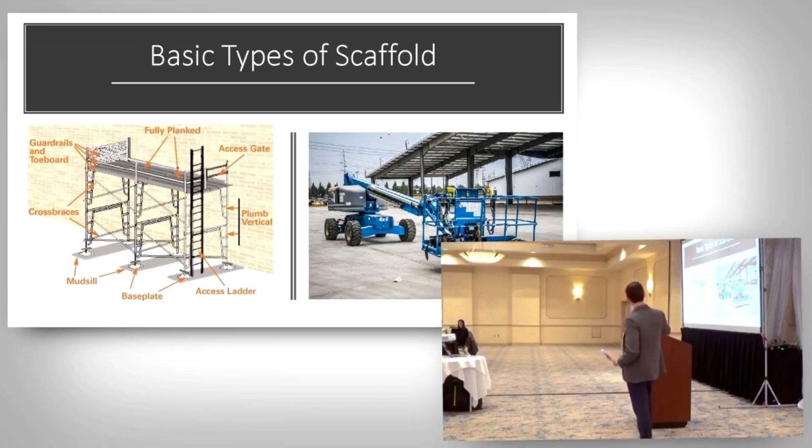So 2 of the basic types of scaffolding that we have, this one's a supported scaffold here. This one's an aerial scaffold. And these are the 2 types that I know the roofing side uses the most, as well as sheet metal. And we're going to talk a little bit about suspension scaffold as well that CBR uses a little bit.

What are some of the types of scaffold hazards? Who knows one of the types of hazards? Fall protection. Fall protection, so falls, right, slips. Maybe there's no guardrails, maybe you're not using a personal fall arrest system. What else? Gaps between the scaffolding. Gaps between the scaffolding, right, issues with the planks.

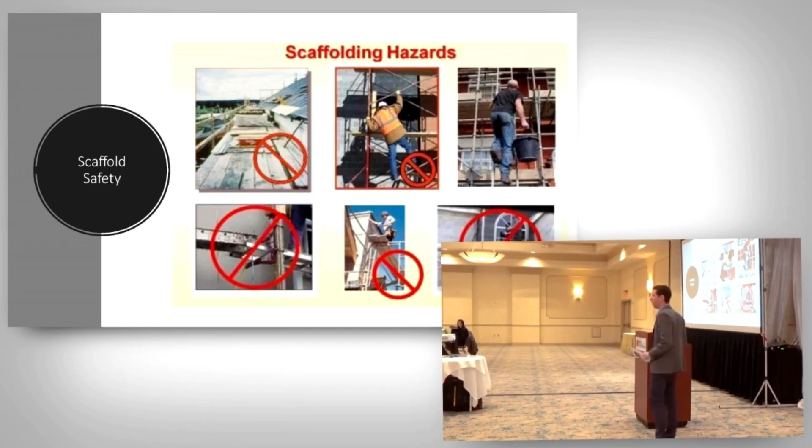How about overhead? Materials on the scaffolding, overhead. You don't need to be working on the scaffold for the scaffold to be a hazard. You can be working below it or around it. Okay? Electrical, working on scaffold that's near power lines that maybe isn't protected correctly.

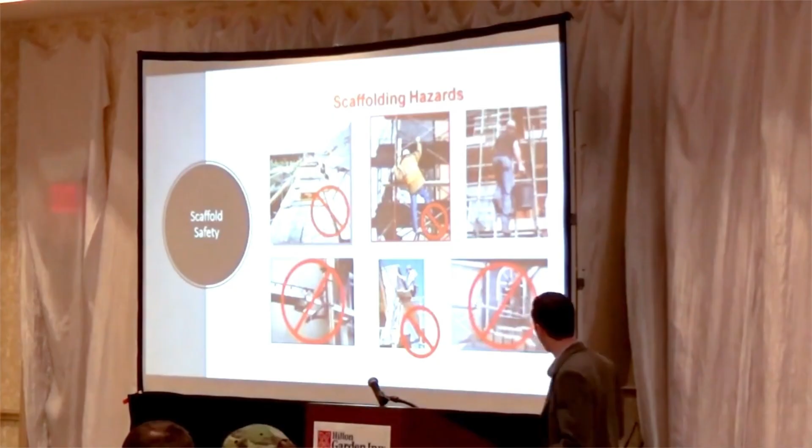How about if the scaffold collapses? We talked about 1/2 of all the accidents with scaffolding is from faulty scaffolding. So if it collapses, a hazard. Plank hazard we mentioned. How about bad weather? Ice, snow, wind, all can cause a hazard of scaffolding. And hit by, struck by. You're working on a job site with movable equipment, knocks into the scaffolding.

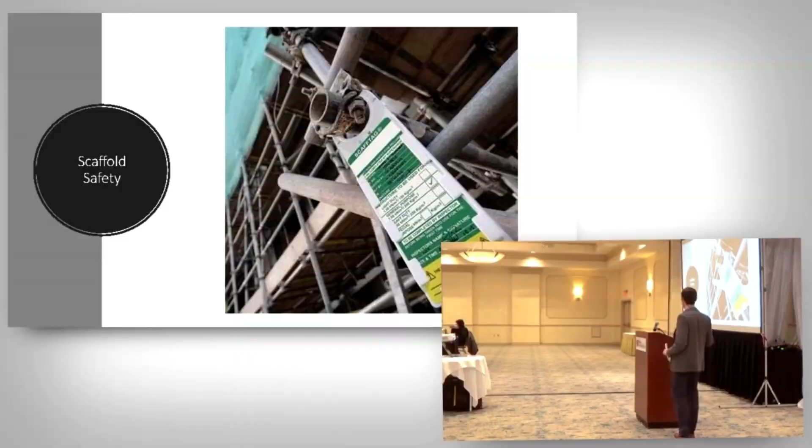What is this? Inspection tag. Every day the scaffold needs to be inspected by a competent person. Okay, what's a competent person? Someone that can identify hazards and correct them. So at the beginning of every day, a competent person needs to inspect the scaffold and hang this tag in a place where everyone can see it. It's usually at the bottom of the scaffold, the access point.

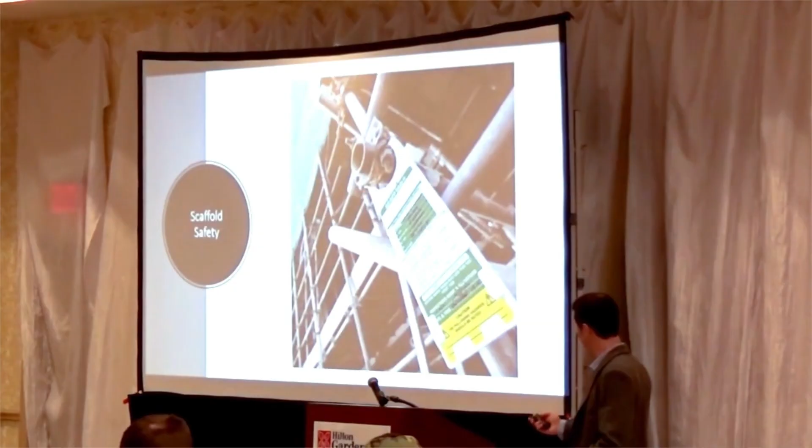What's our policy with hard hats on scaffolding? Wear it at all times, just like ladders, right? Always wear your hard hats. Here we go. How do we know scaffolding is safe? Solid foundation. This is a plank here put on the feet or the base of the scaffold. But our scaffolds are normally put on grass, mud, areas that aren't solid, so these are called mud sills.

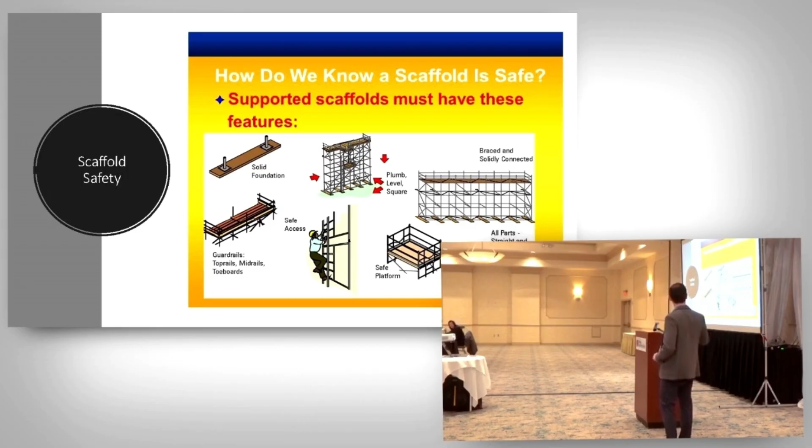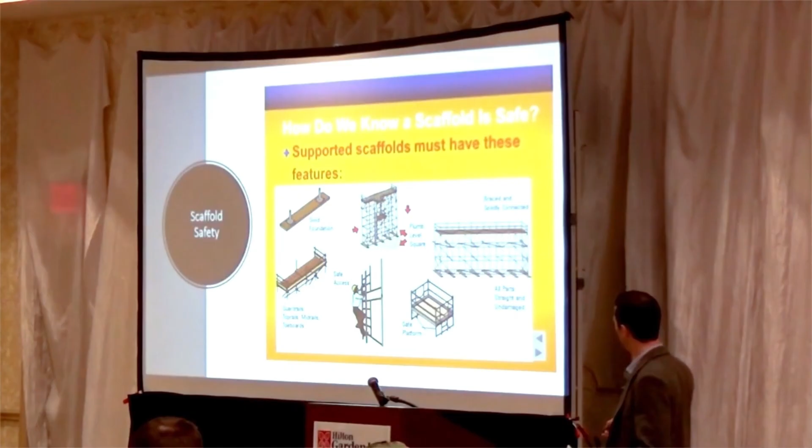Scaffold needs to be plumb and level, square, and braced. Every 20 foot vertically and every 30 foot horizontally needs to be braced. You need a safe work platform, you need a safe access, and guardrails. We talked about the guardrails and toe boards as well.

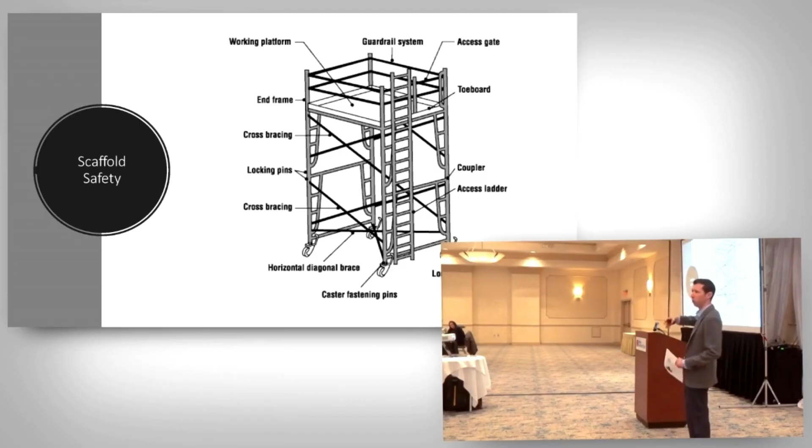This is a rolling tower. So on this, you need these locking casters. Okay, they need to be locked when you're working on the platform. What are the heights of the guardrails? 42 and 21, plus or minus 3 inches, right? Toe boards here. At what height do you need a toe board? Sorry? 10 foot. You don't need toe boards until you're at 10 foot. Guardrails you need at 6 foot.

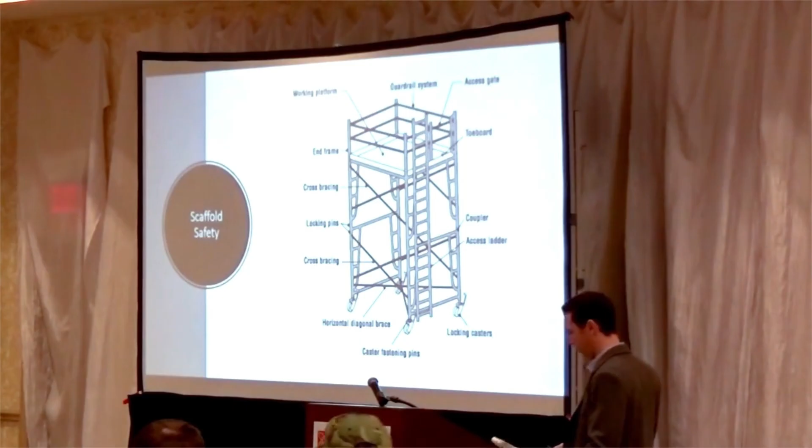Cross braces, this gives strength to the scaffold system. Are you allowed to climb these? You cannot climb the cross braces unless they're designed to be climbed. In most cases, they're not. Do we use a lot of wood plank scaffolding? I don't know if we see that a lot in our jobs. You do. You do? Okay.

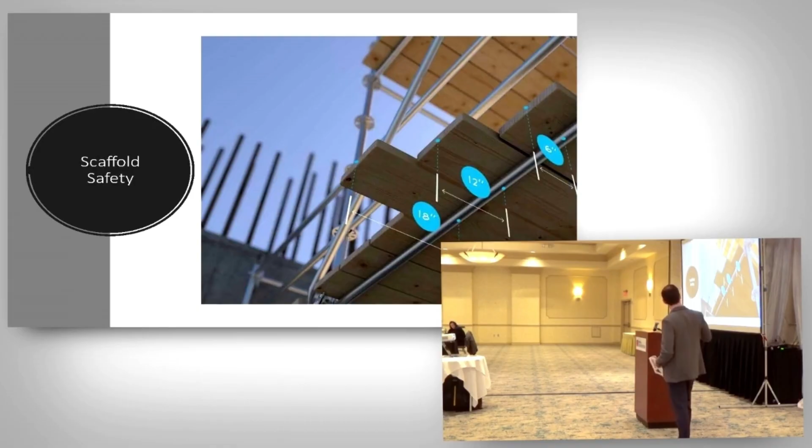2 important numbers to know. 6 inches and 12 inches. This is the end frame, the end support here. This point cannot be less than 6 inches overhanging the end support, and it cannot be greater than 12 inches. Okay, so 18 inches past this end support. This is out of compliance.

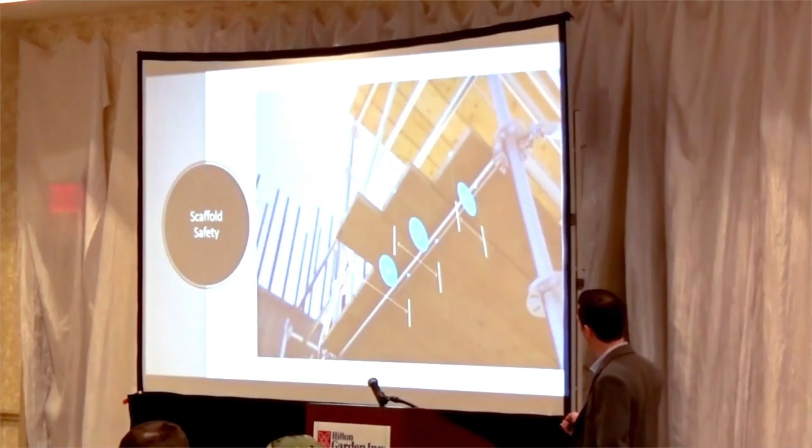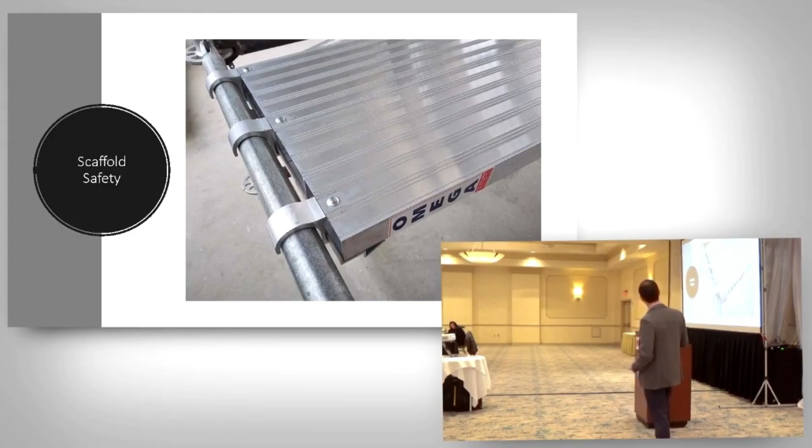This is an aluminum frame. I know we see these a lot. This thing right here, it might be tough to see, but it's that little lever on the bottom of the scaffold. It needs to be locked into place. That's what secures the scaffold plank to the frame.

And these are the kind of details, guys, they don't seem important until we have a high wind event and all of a sudden those planks start getting blown off and become flying objects. And I know we have started inspecting our scaffolding after it's erected instead of trusting the erectors. And we're getting better, they're getting better, but I don't know, and Mike, correct me, have we yet to have one installed properly the first time?

No. They're not installed by the guys that are installing them properly, ever. We've yet to have one time where every little clip was installed. I mean, the one that I know that's the most infuriating for me is when you get to the top and there's the gate that protects the access point and it opens out freely. That's awesome, right? So I can fall right off the scaffolding as opposed to being able to swing in and access the scaffolding. But I mean, the common sense stuff, you gotta look at it, check it.

We're auditing them now at installation. So when we accept it, it's been inspected. And I know Jim Petrosky's been doing a lot of those, as Jim Rehard probably has put down a fair amount. They are getting better, but just keep that in mind.

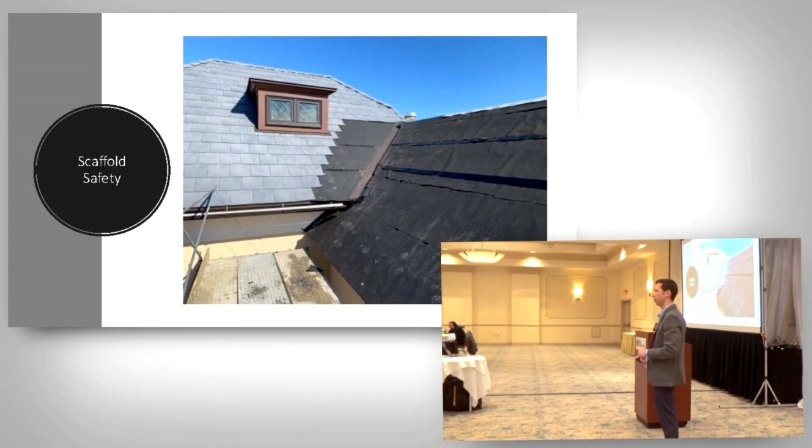The other thing is the other trades using them. Just like our safety rails on the perimeter, what was safe yesterday when it was inspected may not be safe. Somebody might have damaged, removed, or somehow modified the scaffolding to where it's no longer safe like it was yesterday. That's why it's important to inspect it every day, right?

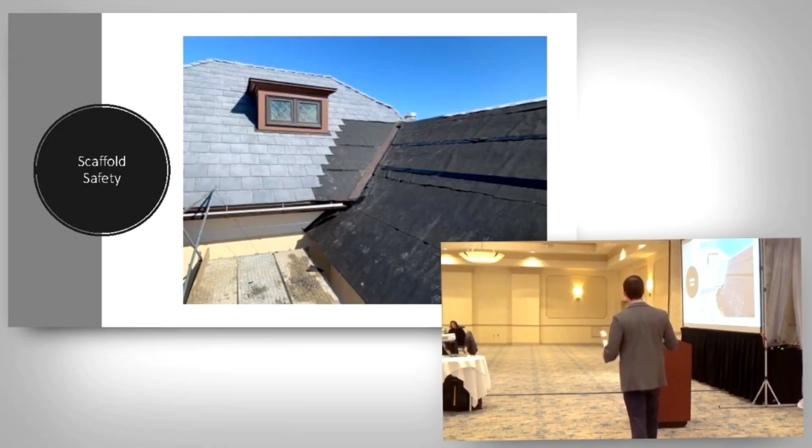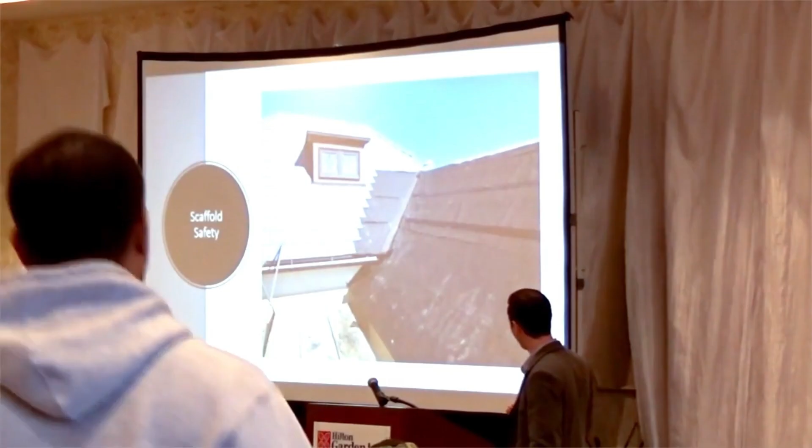What job is this? Crew. Nice. We won a couple nice awards for this job. Here's some scaffold that we had set up while Mr. Parabo was installing this nice looking slate here. We have a guardrail on the back end. There's no guardrail here, and there's no guardrail here. Is this in compliance?

Yes, it is. You do not need guardrails when the building side of the scaffold is 14 inches or less away from the building. A little bit different on suspension scaffolds. That number shrinks down to 12 inches.

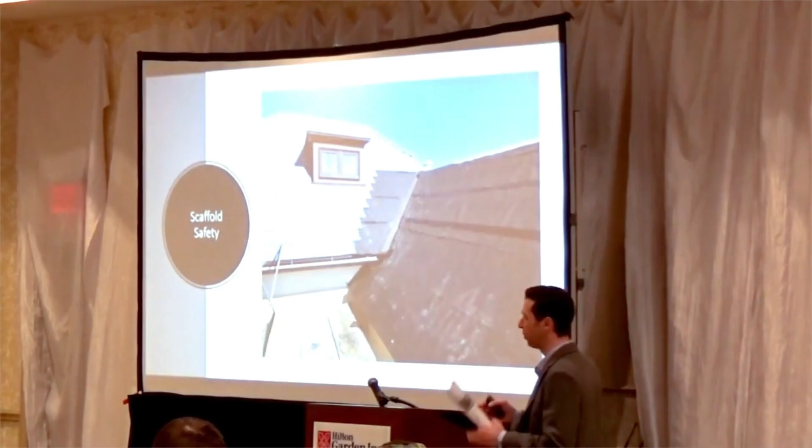Question. How high can you build scaffold on rollers, on the wheels? That's a good question. I don't know that answer. Is Dennis here that might know it? Can you get that from your written answer? We're going to find that out for you. Yeah, I think that's a good question. I think part of the complexity is the size, right?

For those of you who don't know tectum, it's a lot like a ceiling tile, the grid. And so one tile might be bad. So you might be fine all day long, and then you win the lottery and find the one tile that's bad, and you get an express ticket down, right? And so you're otherwise protected with the barricades and whatnot, but you may not be harnessed. So we're talking about putting these underneath.

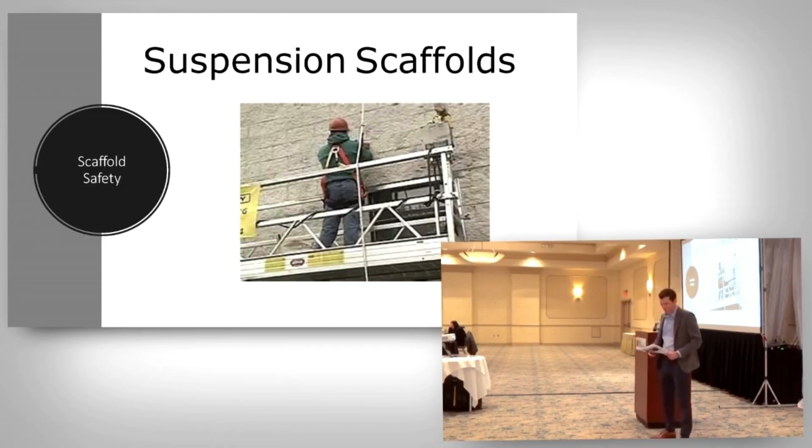This is an example of a suspension scaffold. So it's a scaffold that's hung by ropes. The ropes need to support 6 times the load. So that's 6 times the weight of the scaffold and anything on it, so employees, equipment, and tools.

Just like the other forms of scaffolding, you need to inspect it every day. It needs to be inspected by a competent person. You need to evaluate the connections, the supporting surface. You need to inspect all the ropes. This is also important: you need to have a lifeline that's attached to an anchor point independently of the scaffold. So the anchor point cannot be attached to the scaffold itself. It needs to be attached to something else.

I hate to keep interrupting, but

one of the things our safety professionals have been noting, this is really true with roofing, but it's probably true with all the trades: when we're going up a ladder and the parapet wall is so high and then you've got to come back down, it's the same thing, right? You can't just jump off the parapet down to the roof. And so what historically we've seen is maybe an A-frame ladder leaned up. It's not the appropriate use for the ladders, right?

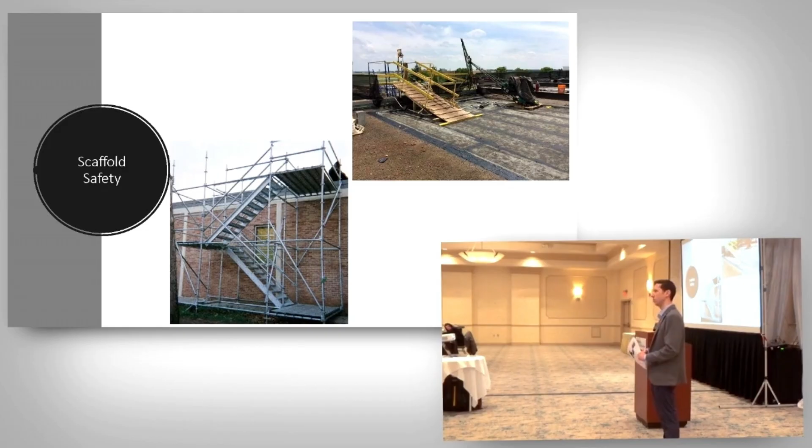The alternative is like what we're seeing here, building a ramp, right? And so some of our crews are very carpentry sophisticated. This may be easier and faster for them. Others, it might be easier to just call and have one of those set out when we're setting the job up. But keep that in mind. That's one of those accidents waiting to happen, just because you hop down and twist a knee, or it's slippery and you fall and hit your head, all of which we've experienced. So learn from our mistakes, I guess.

Sorry to interrupt. Nope, you're fine.

Moving on to ladder safety.

This isn't a Werner photo, but it does look like one of the Werner salesmen.

So there are 300 ladder deaths per year, 300 deaths caused by ladders every year. And I was surprised to learn the height at which most people fall from ladders. It's 10 foot or less when they die, surprisingly. And falls from ladders are also the leading causes of death on construction sites.

Here's the ladder. It needs to be inspected just like scaffolding does. The rung, you need to make sure it's free of grease, so it's not a slip hazard. You need to have these anti-slip shoes, and make sure it's on stable, solid ground. Make sure the rope isn't frayed. Make sure all the working parts are moving free and clear.

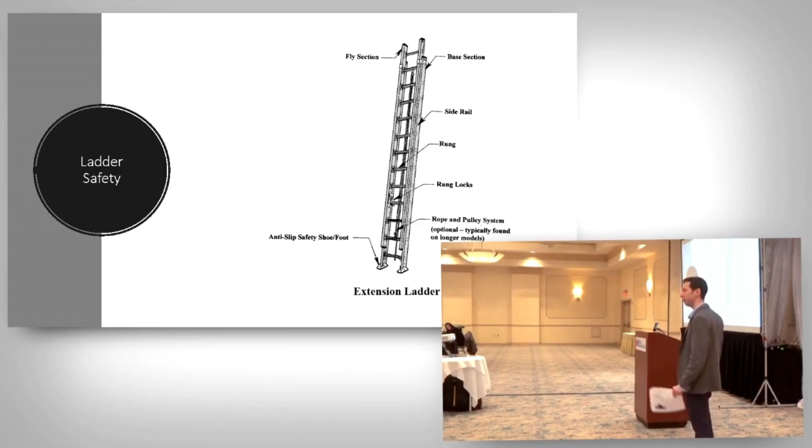Just to interject, the one thing we've been noticing with Derek is our fiberglass ladders, the stickers on them have been weathering. They're still physically on the ladder, but you can't read them anymore. We've been sending out those stickers. So as you're using the ladder, just be mindful if that sticker's not there to let the office know; we have replacement stickers. I know this winter we were putting them on and they were falling back off. It was too cold. But just keep in mind that sticker is important to OSHA.

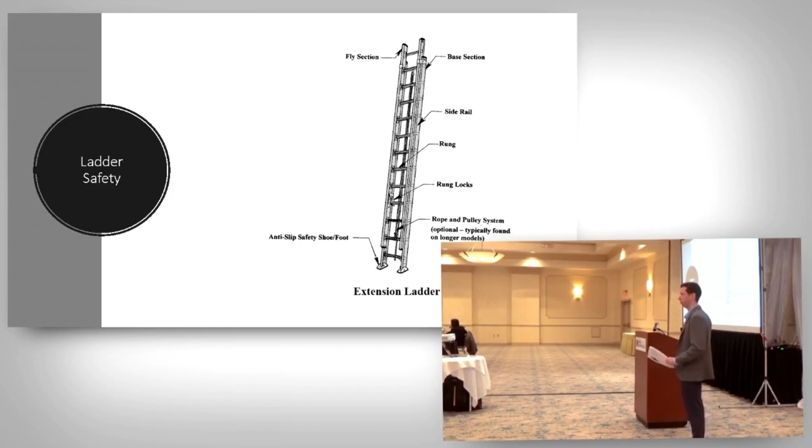4-to-1 ratio. So for every 4 foot the ladder goes up, the base needs to go out 1 foot. Never support a ladder on power lines. That's kind of a no-brainer. And we tie off. You have to tie off the top of the ladder, 3 foot above the parapet. Always maintain 3 points of contact. And never carry anything up and down the ladder. One person on a ladder at all times, never two.

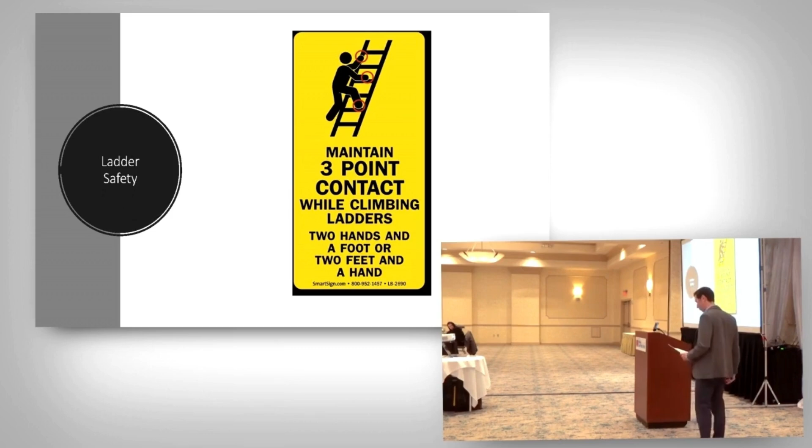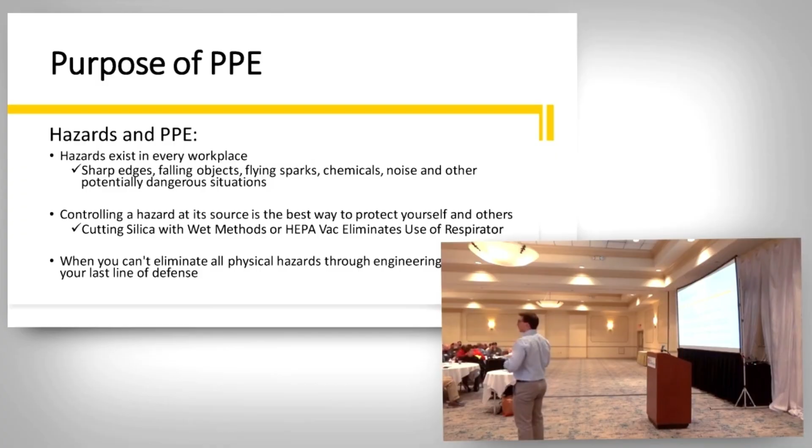We're going to talk about personal protective equipment. The reason we have personal protective equipment is because a lot of times it's the last line of defense when it comes to protecting ourselves. So for example, we would typically use a personal fall arrest system, a harness, and a lanyard to protect us from a fall. But most oftentimes we have guardrails on roofs that we install as the first step of the job, and that's a preventative engineering control to prevent us from having to use personal protective equipment for a fall. Okay?

What are some forms of PPE? Safety bags. Safety glasses, gloves, man, you guys are killing me. Gloves. All right, let's slow down.

You guys are killing me. I've got fruity candy and I've got chocolate candy. Like, who is first here? Back there. Fruity or chocolate? Chocolate. All right, pass that back there. Oh, that wasn't safe.

All right, who had the next answer? Steel toe. Chocolate or fruity? All right, what's next? Gloves. Fruity? All right, what else? Non-cut gloves. We just heard that one. Earplugs. Who said earplugs? Chocolate or fruity?

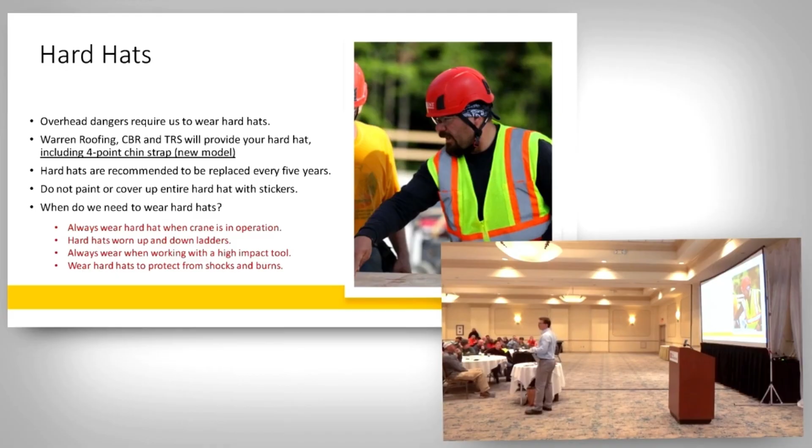All right, so when do we need to wear hard hats? Always? Overhead hazard. Chocolate or fruity? Up and down ladders. Who said that? Gabe? Twix? Scaffold? Who said scaffold? Back there. Chocolate or fruity? Run out of chocolate. All right, we're going to wear it also when there's a crane in the area, guys, that's probably one of the most common times we're wearing hard hats. All right?

All right. Safety glasses. This is a big one. We are continuously having to remind people to wear safety glasses. I actually got called out by a general contractor superintendent the other day about our foreman not wearing safety glasses. And that is a very difficult conversation to have. So please, wear safety glasses when you're on a job site.

And on top of that, when you're working inside the building, you need to make sure you have clear safety glasses on. I'm not actually quite sure if the blue ones are compliant to wear inside or not. I don't know if anybody knows that answer. Yes? All right, so you can't wear the blue ones as well inside. We'll get popped for that too by general contractors.

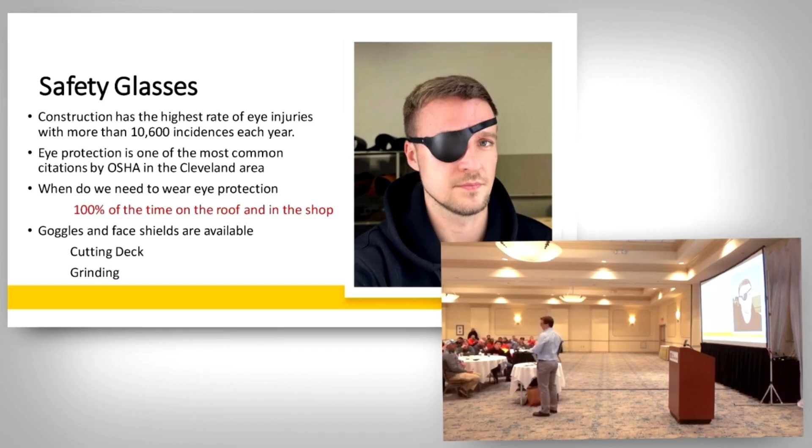This guy obviously had some type of eye injury. He still looks pretty cool, but I prefer not the patch. Okay. So let's wear our safety glasses. I know at home when I'm weed whacking, cutting or grinding something, and I get some piece of metal in my eye, I think to myself, I did that to myself because I should have been wearing safety glasses. So keep that in mind. Wear them at home too.

Oh, I forgot to ask this question. When do we wear safety glasses? 100% of the time, on the roof and in the shop. Thank you. Chocolate or fruity?

All right, gloves and boots. These are the parts of PPE that we need to be wearing pretty much all the time. Gloves, not necessarily, but when we're using hazardous chemicals, hot applications, just general light working or tear off, and we're handling sharp objects. So, what kind of gloves do we need to wear when we're dealing with hazardous chemicals? Chemical gloves. Chemical resistant gloves, rubber gloves.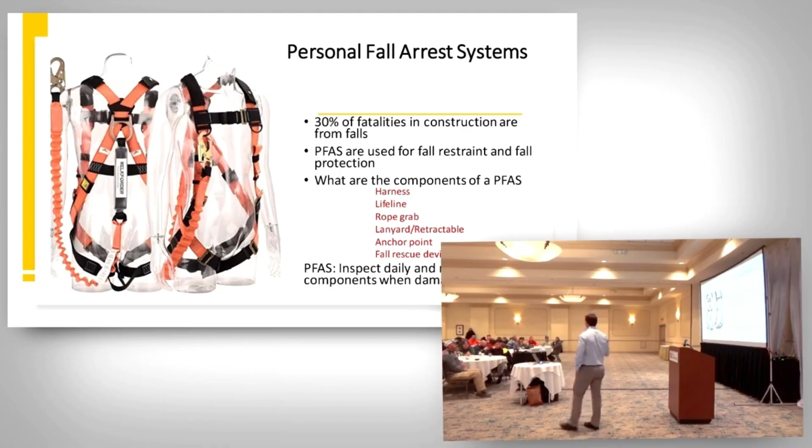All right, so 30% of fatalities in construction are from falls. I know we already talked about fall protection and the equipment that we're using, and I know that's confusing. I do encourage you guys to talk to your supervisor, whether it's Mike, Jim, or Corey, about specific fall protection equipment, because we are using it specifically on some of my jobs at the steel mill. We're using them all the time, and I consider them fairly technical pieces of equipment. So I want to make sure you guys are using them appropriately, so that way, if we do have a fall, the equipment works the way it's supposed to. And we need to inspect these components daily. Can't reiterate that enough.

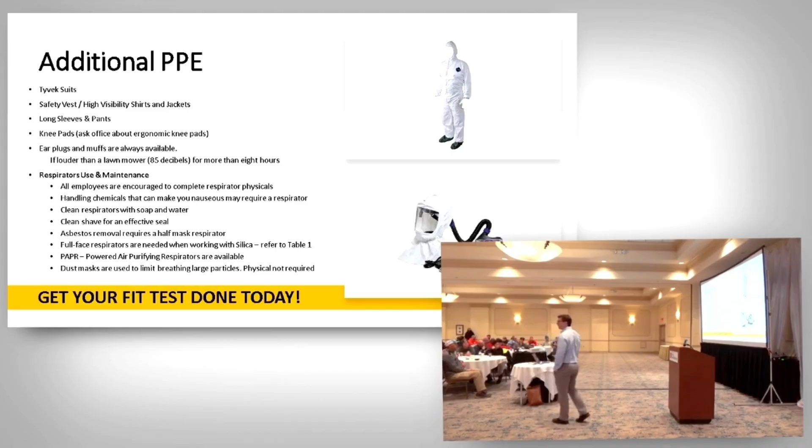In additional PPE, these are kind of tough to see up here. Tyvek suits: when we're tearing off asbestos, or tearing off pitch, or we're in a confined space where it's really dirty, you guys think we need Tyvek suits. We do have them in the shop, they're available. And I know Dave does send them out with the asbestos tear-offs pretty much automatically, but keep in mind that we do have them available.

Knee pads are another one that some guys use, some guys don't. We did have a program a few years ago for some ergonomic knee pads. That program is still in place, and if you do want some better knee pads, I think they're a couple hundred dollars, and we're splitting the cost pretty much 50-50, where you'll be reimbursed about $100 for the knee pads. If you want more information, talk to Nicole or Mike after the meeting, and they can help out with that.

And then earplugs. Earplugs isn't something we use on a regular basis, but cutting metal deck is a specific one. That gets very loud, I know. Grinding, masonry joints, things of that nature where you're going to be involved with loud noise all day long, you're going to want to include earplugs as part of your PPE. And then, again, get your fit test done today if you haven't done so. I think there's going to be time around lunch to get that done.